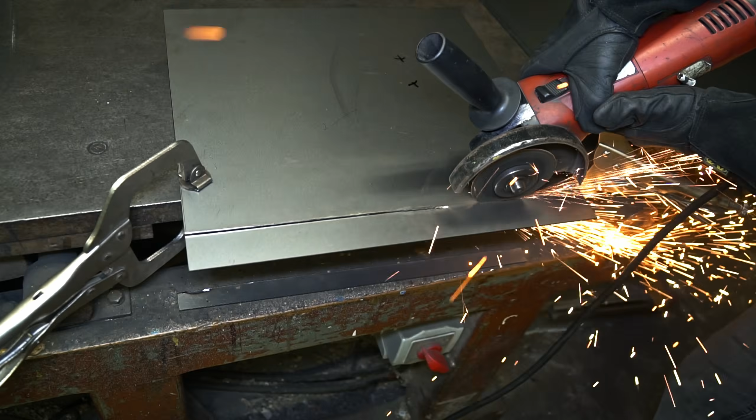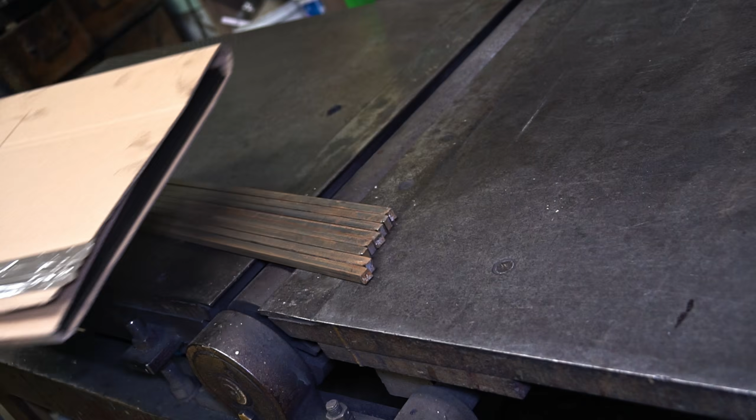This time I'll be making the operator panel for my CNC lathe. The design was made in ZW3D.

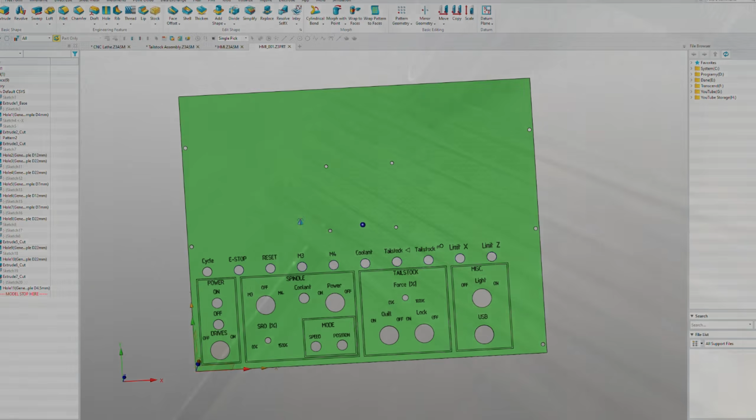I designed the shapes of the sheets and exported the DXF files to use them on my laser. The laser will mark the cutting lines, hole positions and engrave the inscriptions.

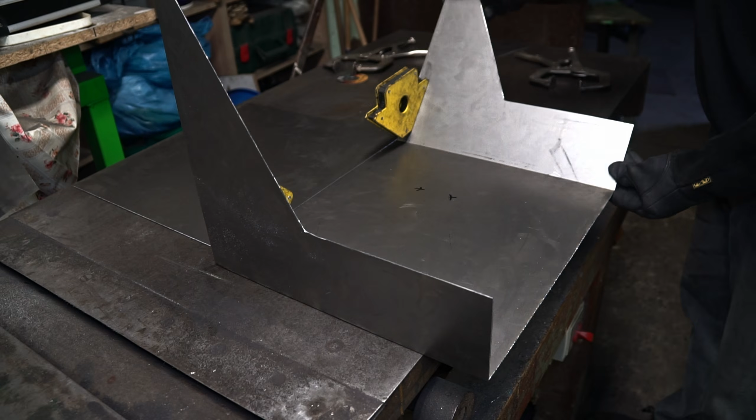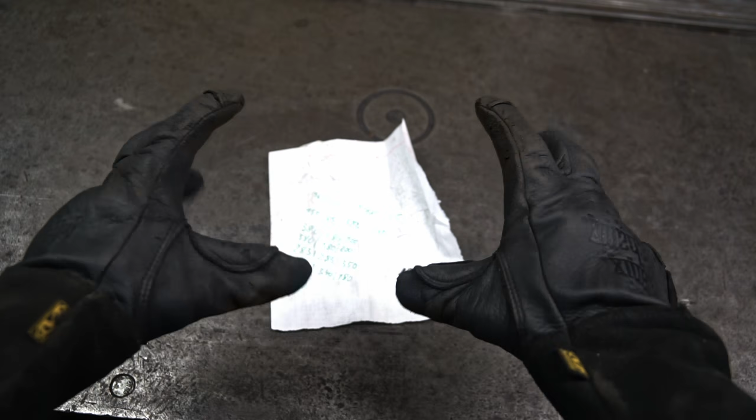List of parts is ready, so let's proceed with cutting the rods to length.

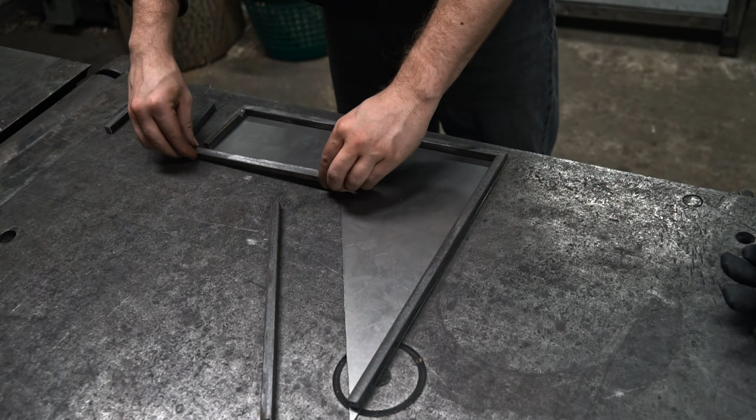The parts are prepared. Now the assembly process. Let's fuse everything together with the MIG welder.

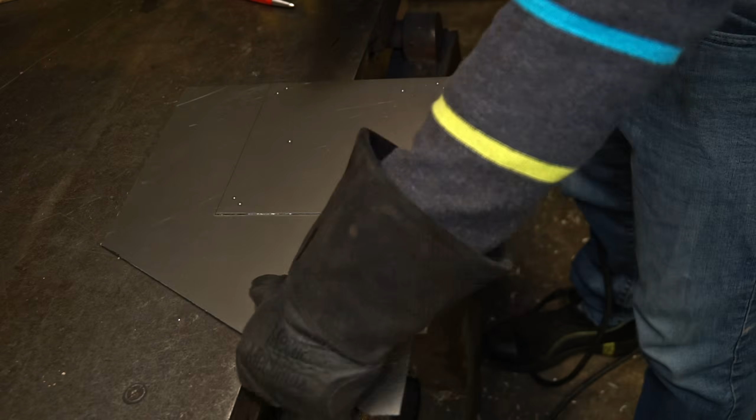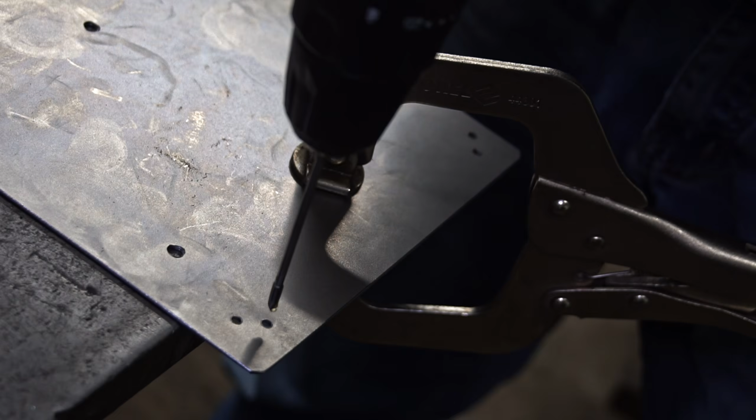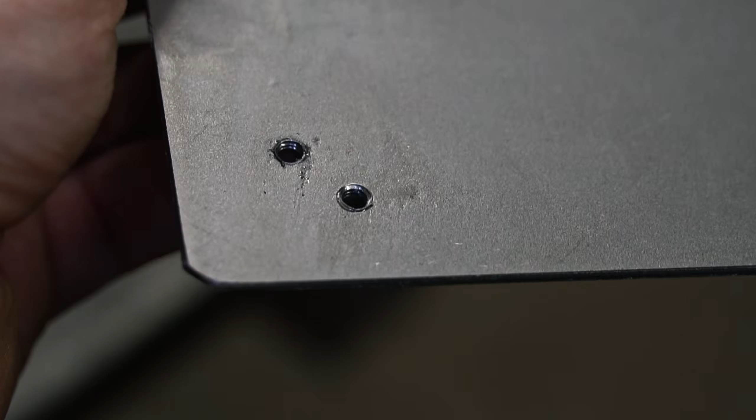Now let's make the holder for the PC. 3D printing some custom designed mounts for the brain of the machine. FDM 3D printing is perfect for such parts.

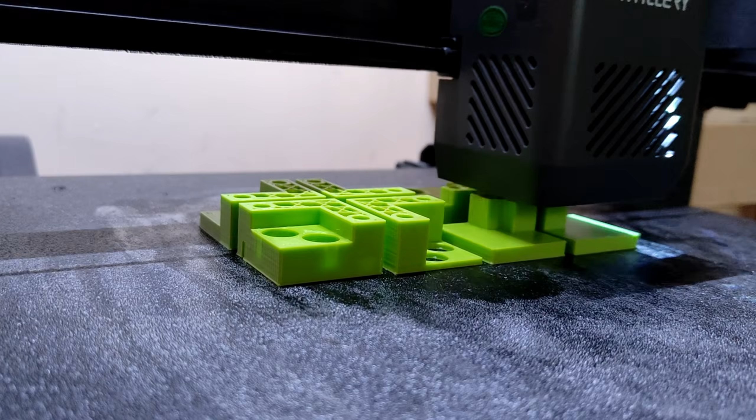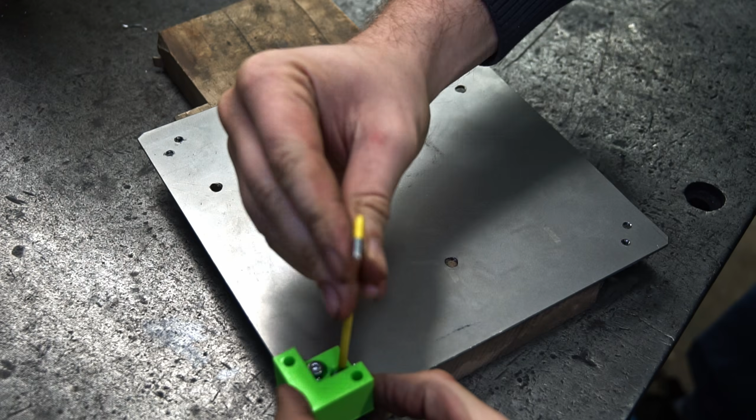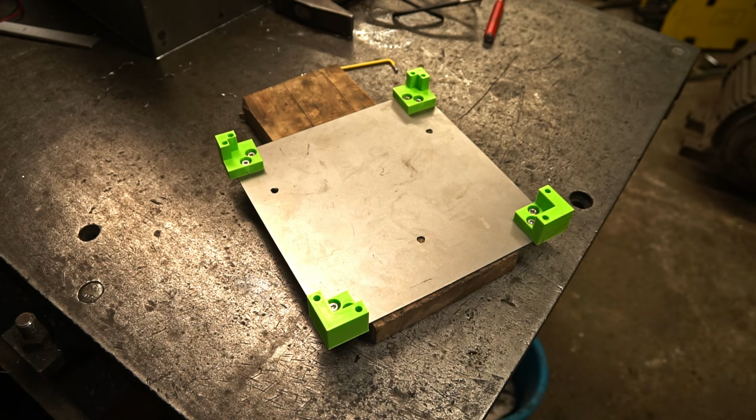This is the PC I will be using in my CNC lathe. It's a Lenovo ThinkCentre I bought secondhand. I was using it during the bench tests of the CNC controller and it performed very well with the UCCNC software.

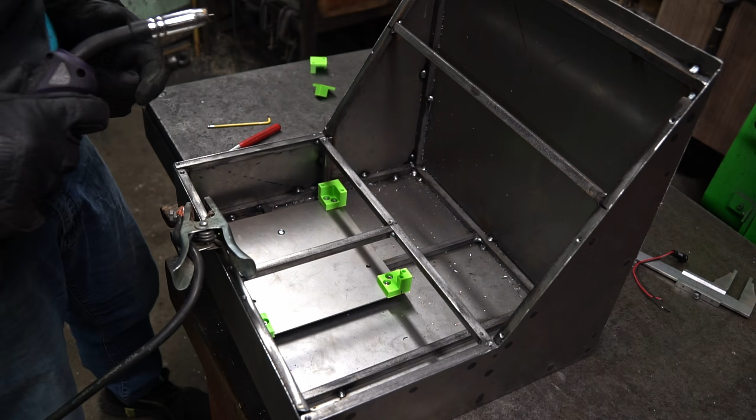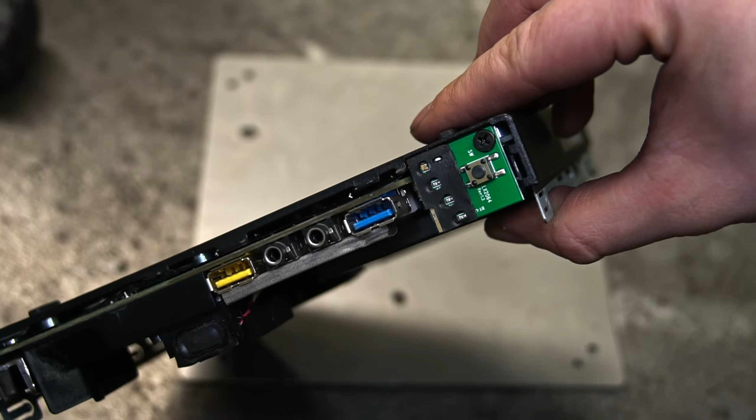I want to turn on the PC automatically when the machine is powered up. I'll solder some wires to the on-off switch, so later I will be able to attach it to a relay.

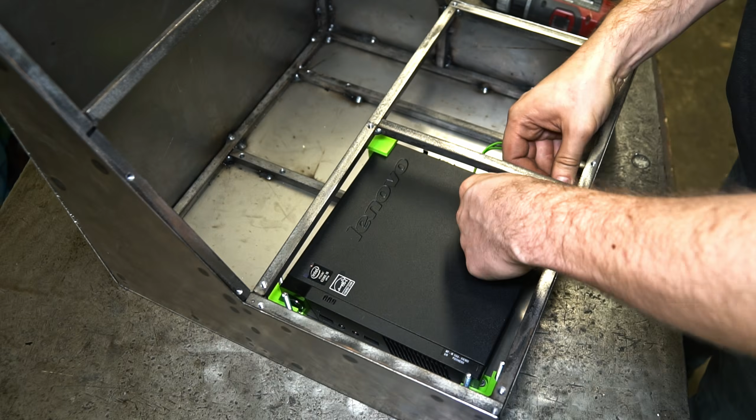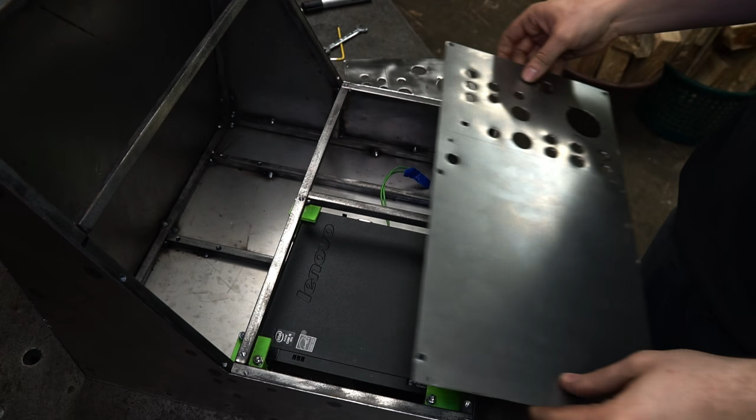The box is kind of ready. Let's fit the MPG, buttons and all of the remaining stuff.

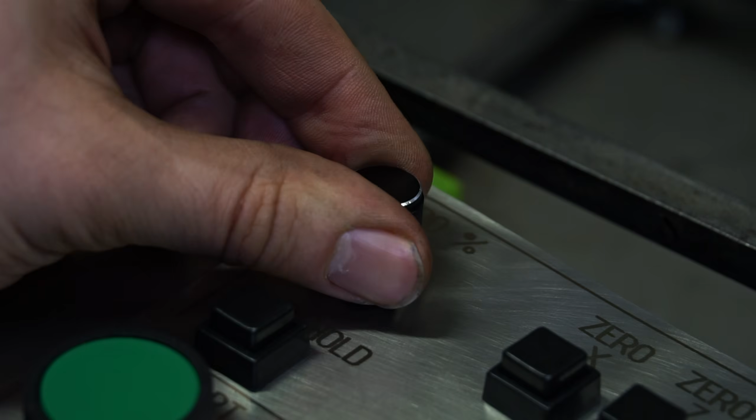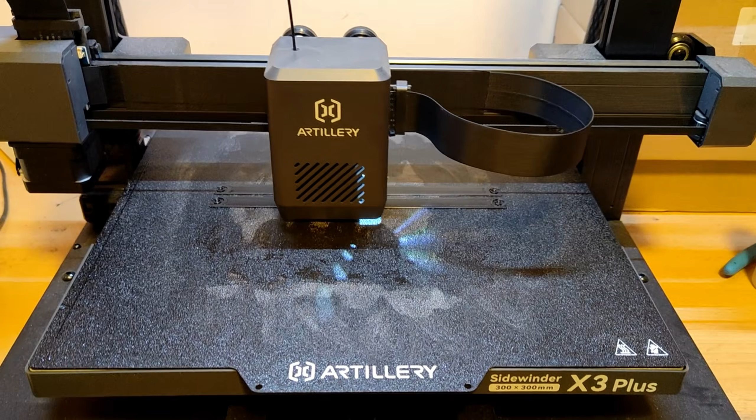And here I'm printing the keyboard holders. Well, actually the 3D printer is printing the holders.

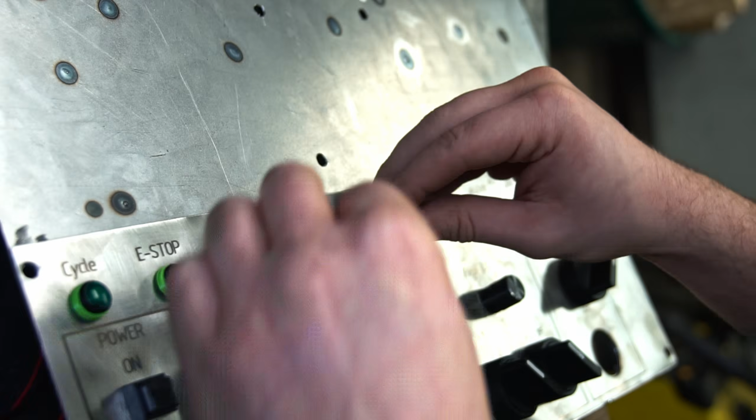I added there a 16-inch touchscreen I found on AliExpress for about $90.

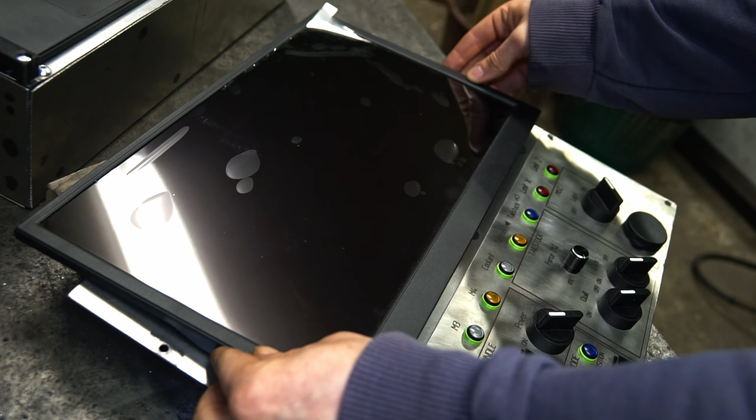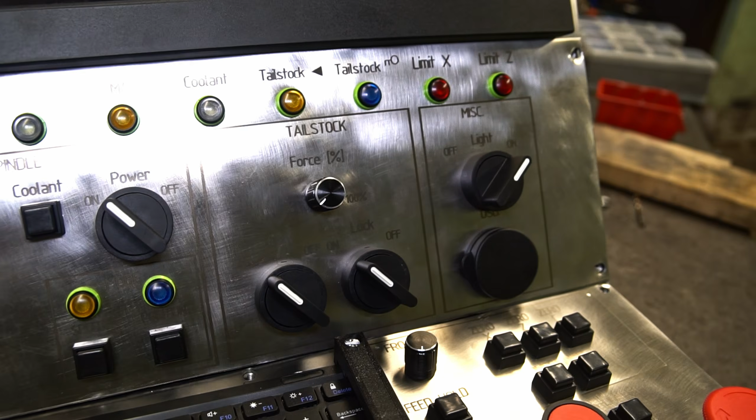The panel is ready to be painted and wired to the lathe. More progress soon.